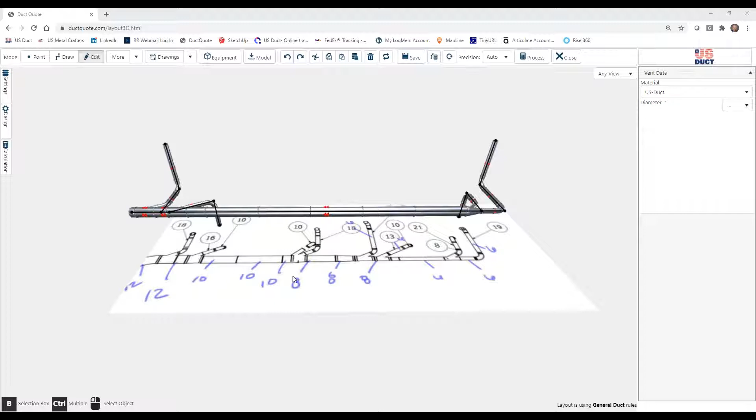So, what this session is going to be about is how to draw to use those standard sizes and hit the mark. It's going to involve both how to check to make sure where the end of the duct is reaching and hitting the right port, and also we'll talk about some strategies and techniques.

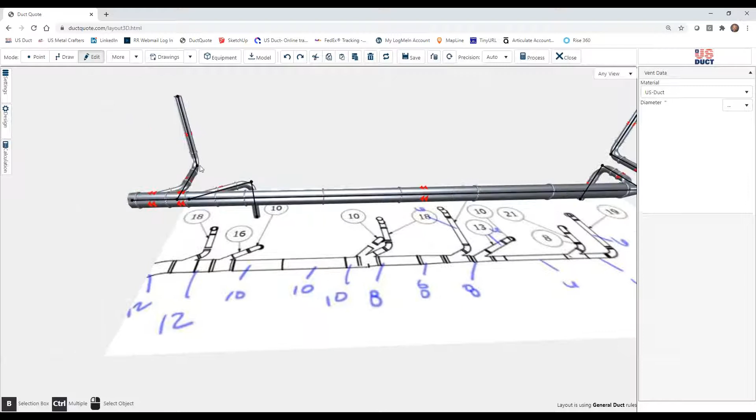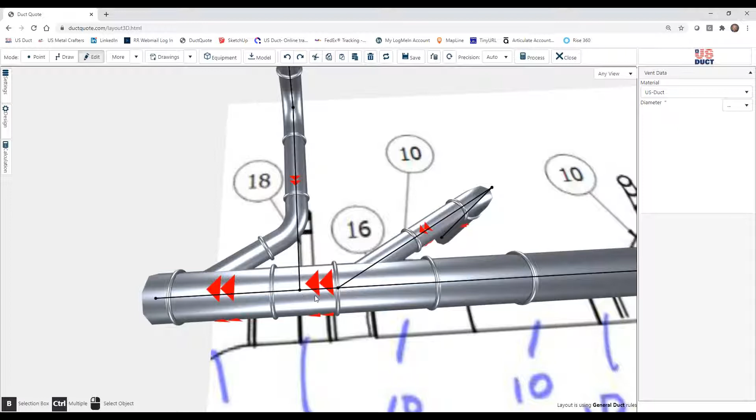So here is a section of an actual DuctQuote that was done recently. And you can notice if we zoom in that there are quite a few very close connections made here. Okay. Now it's been begun, and you can see at this end that we do in fact have, that's number 18 and this is number 16. We've got these that are very close. And if we zoom in, you'll notice that we have a 30-degree branch here, a 30-degree branch here, and in between them is a short section of duct. That is so that we actually hit the marks.

Let me show you how to check. If we put ourselves in draw mode, and as you know, to make a branch, we can hover over an existing duct section over the center line, and we see the crosshairs down on the actual floor plan. Well, I can do that with a vertical piece as well, and you can see that the crosshairs do fall on where that should hit. If I do it on the one that goes up, again, we can see the crosshairs fall on where that should hit. Now, this is an example where something is just slightly off center, okay?

So here's how we would adjust this. The first thing we do is go into edit mode, and we look to see, yes, there is a piece of straight duct that can, what I call, absorb the change. Now, remember, we are just off center. This is a 6-inch piece of pipe. And so I'm going to guess that we are about 2 inches off of the center there in the blue direction, which happens to be this line here.

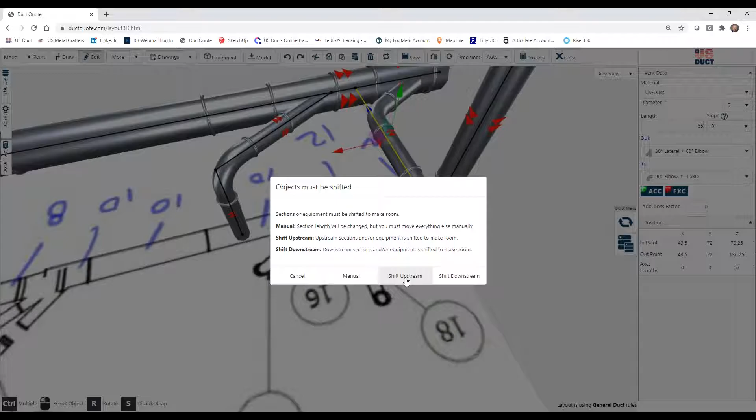So I'm going to go back into edit, and I'm simply going to take 2 inches out of this. 57 inches now becomes 55 inches. And because we want to move this piece that way, we want to move the upstream end. So we click Shift Upstream. And now if we go back into draw mode and hover there, we're almost on dead center. Maybe we should have pulled out 1 inch, and we could do that. But let's move on. You see how we can check and make adjustments there.

Let's move on to where we're actually going to have to put these things into place. So here we have a couple of very tight fitting areas. So I'm going to start with this first one, the one closest to the collector. We're in draw mode, and I can see that this is a 30-degree branch. Since this one is so close, this is almost assuredly a 45, but everything else I see is a 30. So I'm going to see if I can do this with a 30.

I'm going to come back, and right here, I'm going to click, and I'm going to tell it I want a 30 degree, and then I'm just going to use this to see if it follows that line. And in fact, it doesn't. You can see it veering off. So we'll switch over to 45 and see if that follows. Well, it does follow parallel. Unfortunately, what it doesn't do is start in the center.

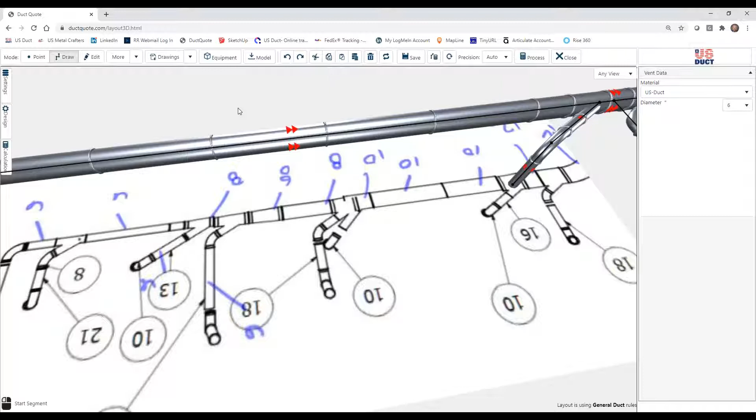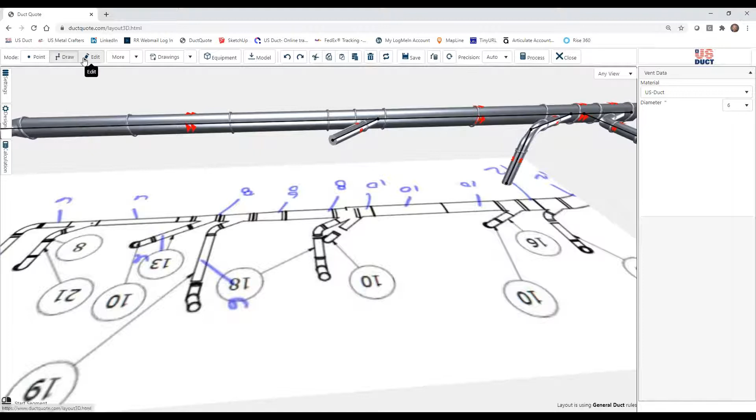So I'm going to right-click to cancel that, and we're going to go back, and I'm going to start a little bit closer. Click there, choose my 45, and there I'm running right down the center, and I come to the center of where that elbow would be, and I click to proceed. Now I'm going to go ahead and actually add, these are 36-inch vertical drops, just like that. So that one is finished. But now we've got to get this next one.

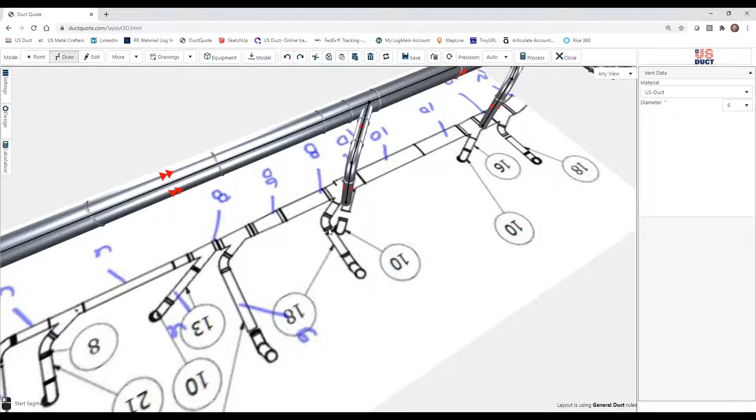Now, some people might start here and draw straight out and let DuctQuote create the elbow and the branch. But I want to point something out to you. If you look here, you can see there's a little bit of duct in their drawing, and I'm guessing they're right. So we are going to draw our branch just like we did here. And I'm simply going to come back until I reach that line right there, if you're looking on the drawing. I'm going to click, tell it 30 degrees.

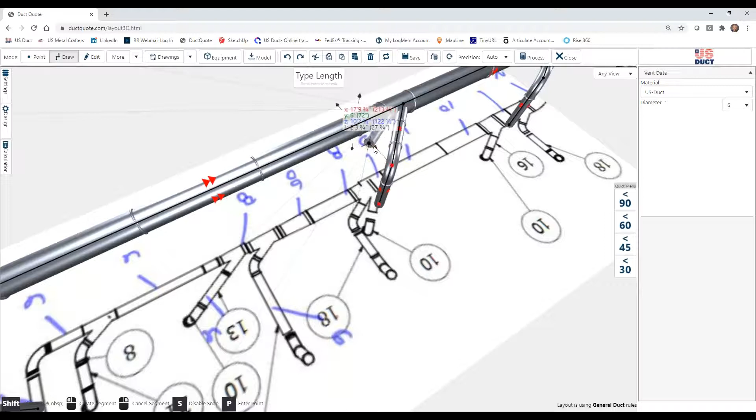And then we're going to look and see, are we following in the center? Well, looks like we're just off, okay? So again, we're going to go back a little bit further to that other line there, right about there, 30 degrees. And now you can see we're in the center of that duct.

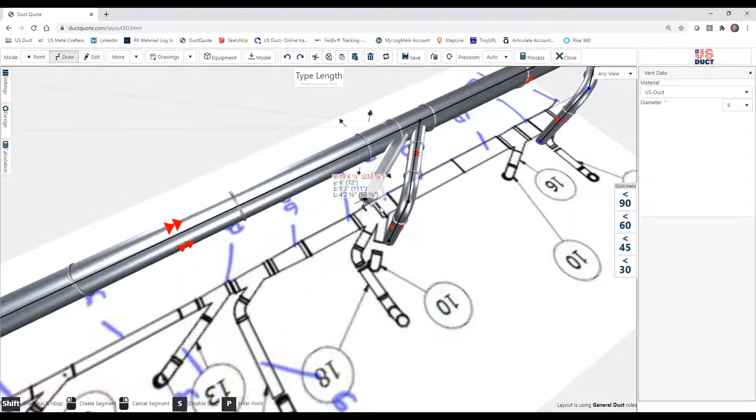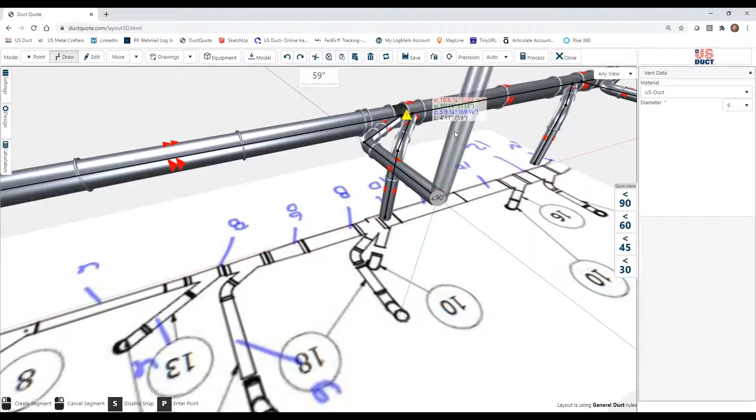And sometimes it's hard to see, but I'm going to come back until I'm even with the center of the next piece. And now we will draw over and we'll finish on that circle. Now, this, by the way, is an up, so I'm going to go ahead and put that in. But here's where things get interesting.

Notice that DuctQuote is telling us we have a problem here. That's what that warning symbol says, that DuctQuote has detected that what we have drawn doesn't actually fit, okay? So if I select this little section, which should be the distance between the two laterals, I can see that I drew it at 7 1/4 inches. However, it needs to be a little over twice that. It needs to be 15 3/4.

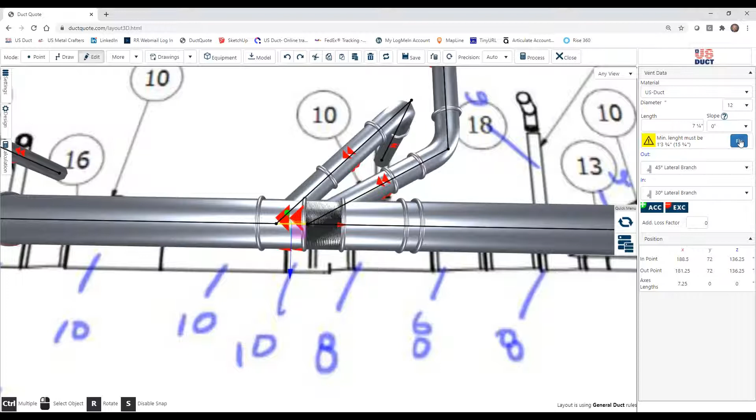Now be very careful here. Watch what can happen. If you just simply hit fix, and most people would fix in this direction, in the upstream direction, watch what happens. We click and we fix upstream. Notice this entire piece moved. So let's spin around and see just how far off that pushed us. Look at that. We are about 7 1/2 to 8 inches off.

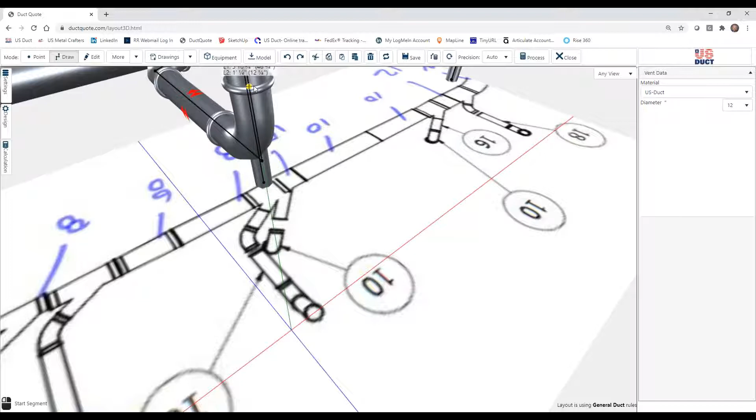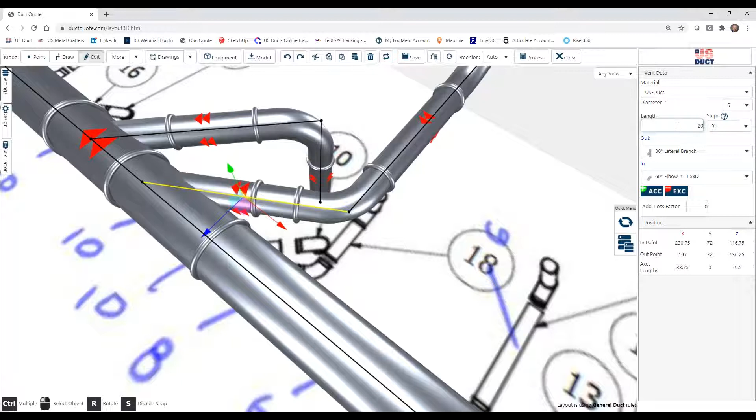Now, the good news is this. We have a little bit of pipe here that we can use to absorb our move back. So if we simply take that, and for me, the fastest way to do this is to pull it back to where it's only the lateral from the branch and the elbow. So I'm going to give it a distance that I know is too short. I'm going to say 20 inches. And again, I'm going to pull this way, so that's upstream. And good. It tells me I've gone too short. I now let it fix it to the minimum length, and again, upstream.

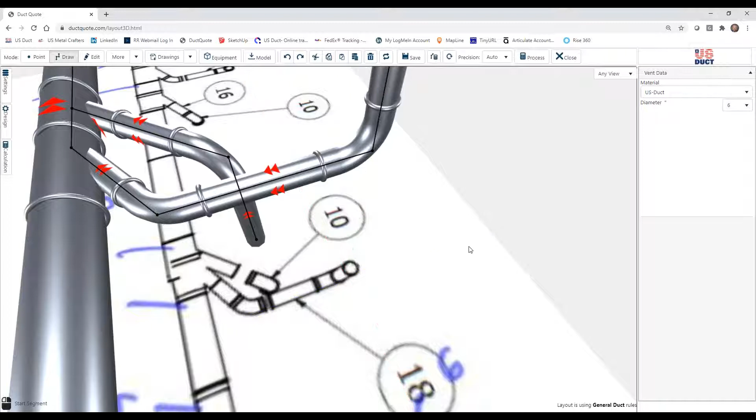Okay. So now we're going to check again, where are we? I go to draw mode, and I hover on the vertical, and look, I am on the edge of the duct. So this is 6-inch duct. So if I can get this thing 3 inches closer, I'll be on target. Well, searching here, 3 inches is going to pull that thing out of the way, but what if we made this a little bit longer?

Okay, so I'm actually going to do, and I know I'm undoing something I just did, but I'm going to put 3 inches back into this. And this time I will push this one downstream. So instead of 15 3/4, we're just going to say, round things off, 19 inches. And again, like I said, we're going to push it downstream. Okay? So now, if we look at this, we are in fact slightly off.

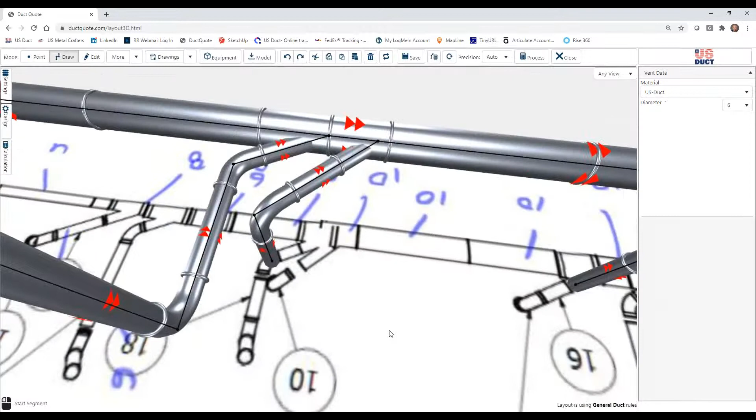However, we now have room to pull this one in. So I can now pull this back in to my 15 3/4. But this time I will change it upstream. And if we now check, we are there. I just need to push it out a little further. Again, about 3 inches. So instead of 47, we're going to go to 50 inches upstream. Now this may seem laborious, but if you have to hit the mark on these ports, this is what you've got to check.

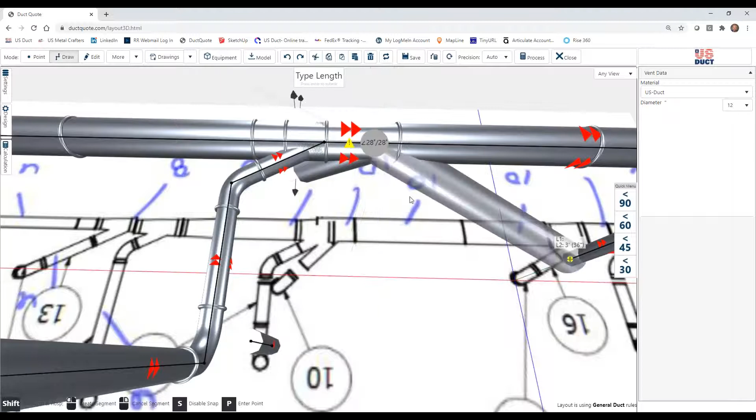Now, we aren't done yet. Remember, we have to fix this one. This one may involve having to change something about this. Okay? So let's check for a second. I'm simply going to pull this out of the way. And let's see if we can actually make this a 30 degree now and get away with it. So we're going to change the in of this from 45 to a 30. And we're going to draw that 6-inch lateral at 30 degrees. 6 inches, there we go.

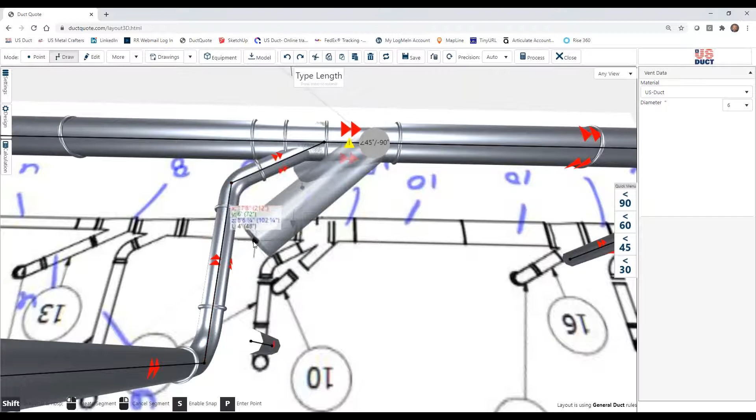And I'm going to see if, nope, that's not going to get us there, is it? So we're going to go back to our 45. And again, our 6-inch. So here we go. We come to right about there, and I turn off my snap. Okay. And we correct this to be the 45 again.

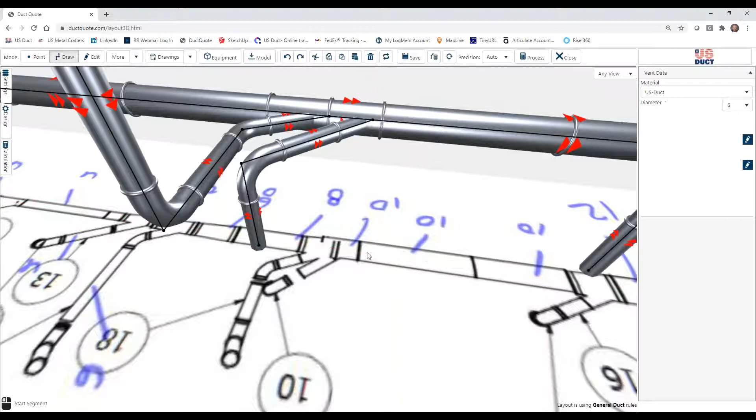Let's now push this back and see where we are. We're within 2 to 3 inches there, okay? And that may be as good as we can get with this particular configuration where they've drawn things so close, okay? Now, another way to deal with this is we might move this entire branch and simply come down here. You would have to check with your client to see if there's an obstruction in this area. And in this case, I believe there is. But we could come from back here and then a straight piece over. That would be another way that we could do that.

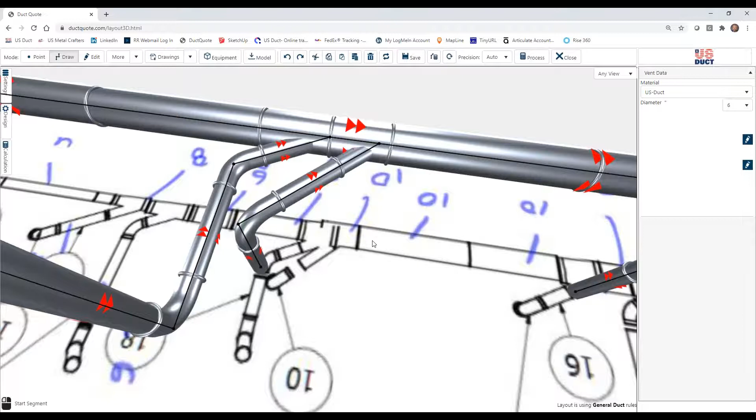All right. So again, using draw mode, the fact that you can hover over and see the actual crosshairs down on the drawing allows you to double check, have you hit the port. Do not fall into the trap of when DuctQuote tells you that you have something that is too short, that you can just willy-nilly change it, allow DuctQuote to fix it without coming back and double checking, am I still on target or not? All right?